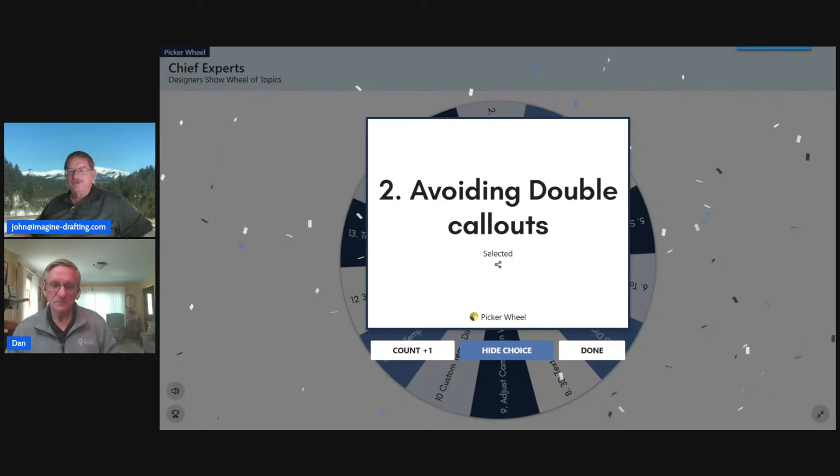While Dan's spinning that, we basically just do the spin of the wheel sometimes to come up with topics to talk about. So if anybody's got any questions or topics they want to talk about Chief today, make sure you put it in the comments. Yeah, bet. There's so many, we could go on and on forever talking about Chief, as you guys already know, and as we already do, we could pick out any.

We could talk about the project manager for hours, but we're going to talk about double callouts. Have you ever had double callouts? So when you're working on a project, let's do a door schedule quick, or a window schedule. Anytime you do a schedule, let's pop in a quick schedule here. So we got a door schedule on the first floor, and then I'm going to paste a door schedule on the second floor. And when we go look at the callouts, you'll see we get double callouts. And you go, why does that happen, John? It happens because you have two schedules. And what's the key thought for that? Two of the exact same schedules. Exactly, okay.

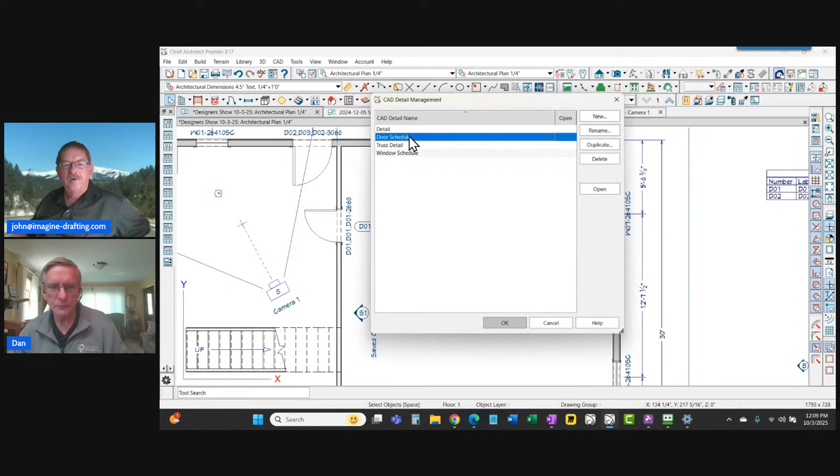I'm actually surprised I didn't get double callouts right away because I do have a door schedule in the CAD detail management. We used to get double callouts with that, so I'm surprised I didn't this time. I wonder if they did something in Chief where if you put a schedule in the CAD detail window, it just doesn't do double schedules automatically.

I don't know, but anyway, in this way where I have the schedules on the plan, why would you want two of the same schedules in your plan? Well, in this case, maybe I want a schedule for the first floor doors and windows, and a schedule for the second floor doors and windows.

So all you have to do is go into the defaults for your schedules, and under general, you'll have this thing where it says include objects from all floors. We don't want to do that. We want, on this schedule, the doors for the second floor only. There's lots of other options here.

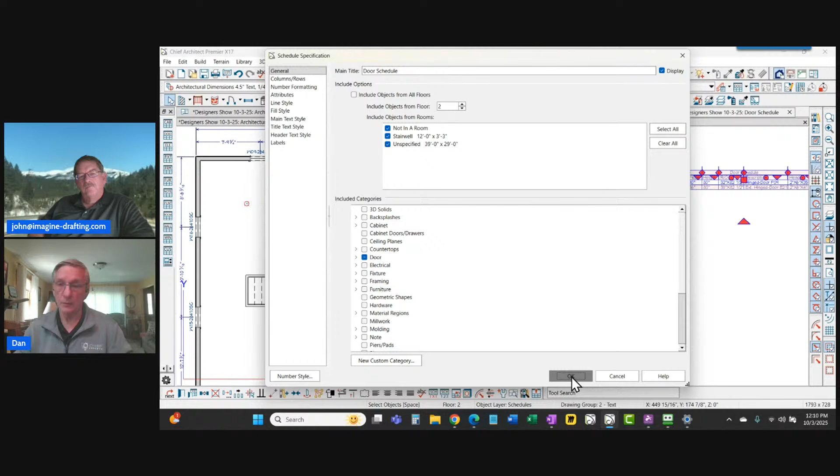Schedules in Chief are phenomenal. You can do just about anything. In fact, I don't even have any doors on this floor, so let me put a wall in and add some doors.

So there you go. Now we've got two different doors in the schedule, and we still have the double callouts. So let's go back down to this one, because it's still set to include everything from all floors. And this one, we want to include just the first floor. Okay, then click OK.

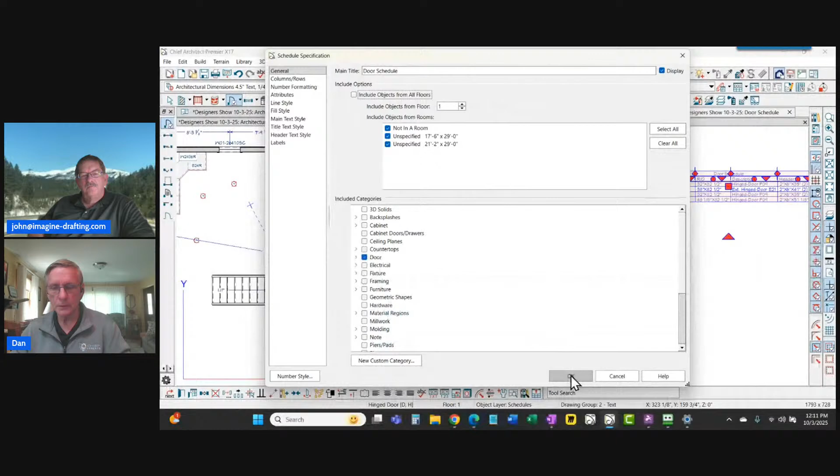And now we got rid of the double callouts. We got it here and here. Although I'm just seeing something - I am getting the double callouts in this.

So your other schedule you'd have set up to labels, not callouts. Yes, exactly, so let's go look at that. Actually, let's just delete that and see if that goes away.

Go back to our plan, and there we go, I lost the schedule, I lost the callout. I like the callout as part of the label instead of a callout like this - that's just my preference. So here's just a plain callout for the door.

So now we got a door callout for each floor. So it did pick up that schedule in the CAD detail window.

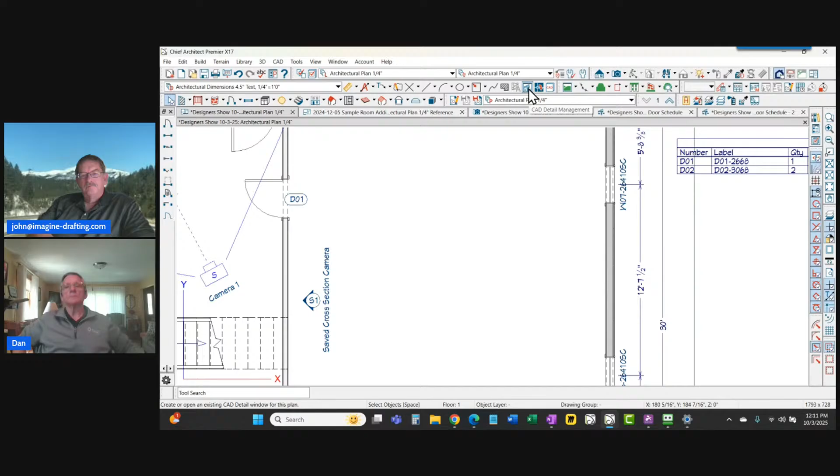So what if I want the same schedule to be on two different pages of the layout? Well, I didn't have that one on the wheel, but let's talk about that.

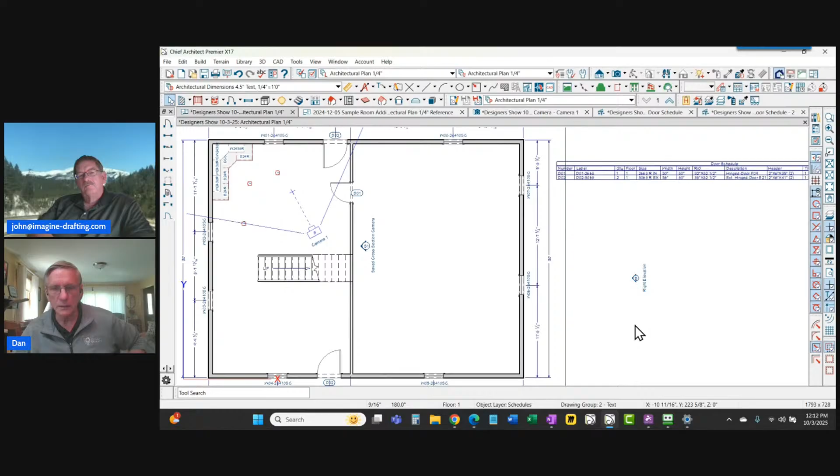So if you open the layout, let me just hit send to layout here. Chief will create a layout for this automatically, and it'll put it in the same project that I have the plan in. So now that's part of that.

So now I can. What I was hoping you would show us, Dan, is that you put the schedule in a CAD detail and send the CAD detail to the layout instead of putting the schedule on the plan. Well, that's true too, that's another option. Beauty of Chief, a lot of ways to do the same thing.

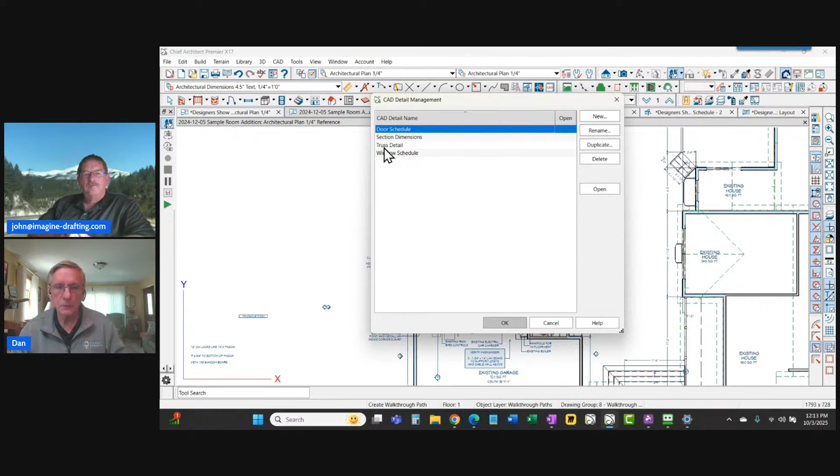So if I would have done what John said and left the schedule in the CAD detail where I would have a door schedule, I could just send that to the layout separately on any page that I want to, without having the floor plan attached to it. So good point. Yep.

All right, back to that. Any questions on that? Nope. I thought of that one because I had a client that asked about that yesterday. Yeah, and there's your answer.

You guys using schedules out there? What do you not like about them?

What's the benefit of using the CAD detail file? The benefit is that you can send it to the layout by itself and position it anywhere you want, regardless of what the plan is or where the plan's sitting.

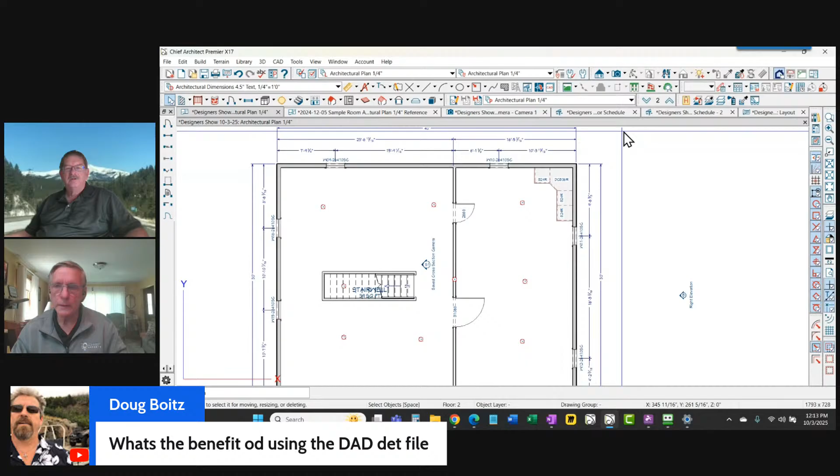Let me show that again. I've already got a floor plan on the layout, and here's the layout with a viewport on it. All I need is one viewport, nothing else. So let's make a copy of this viewport, put it here, open its dialog, and relink it to something else, a CAD detail window.

I just love what they've done with this. I'm going to do the window schedule instead of the door schedule I got rid of. So now I have a window schedule independent of any floor plans. I could copy and paste it onto any plan, any floor, any page of my layout. That works really nice.

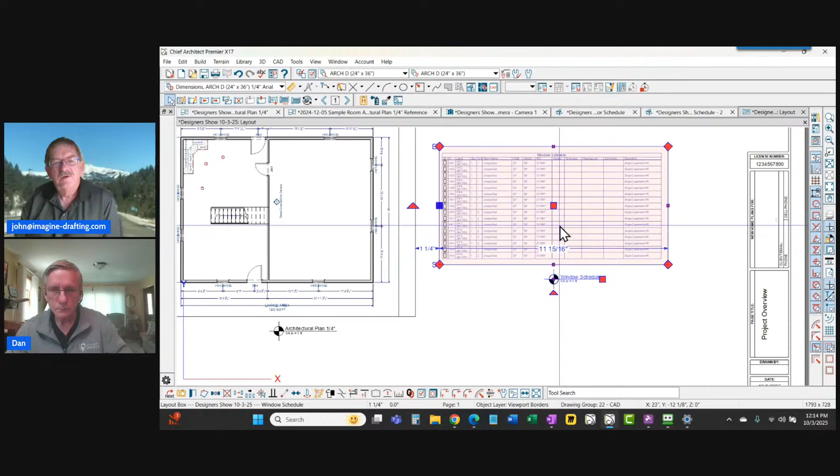So now with the new project management, when we start a new project, are those CAD details with the schedules in them staying as part of the project?

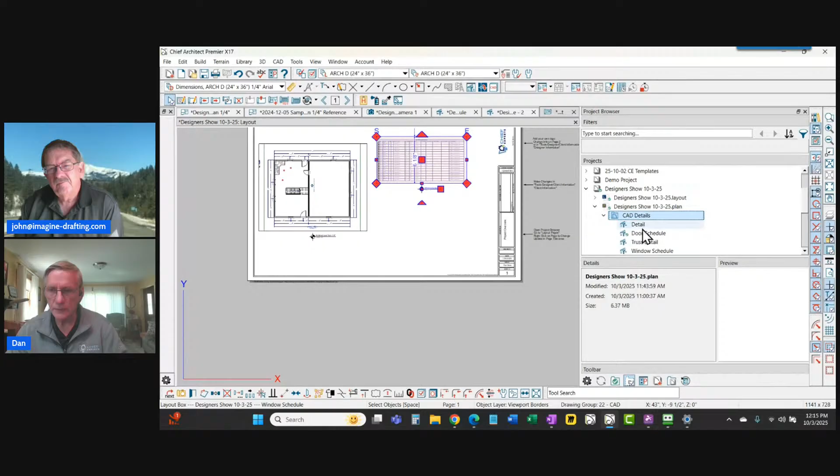Absolutely. So every plan, when it's in a project — let's go to the plan where it has all of these different things. I don't even need to send it to the layout anymore. I can just drag it here, and there's my window schedule.

I didn't even have to send it to the layout. I can just go here, and any of these things you see in the project browser for the plan, I can just drag out onto the screen and put them there.

Now there are reasons you'd want to do that and reasons you wouldn't. If you have a bunch of windows fixed in place, you don't want to be dragging things onto the screen all the time. You want to just click on a window that's fixed, open its dialog, and relink it to something in that list. That keeps the window in the same place so you don't have to move it around.

It's really cool how you have both options now in X17. So you just drag that CAD detail onto the layout? That's what I did — just grab that detail and drag it right there. And there it is, it opens this box.

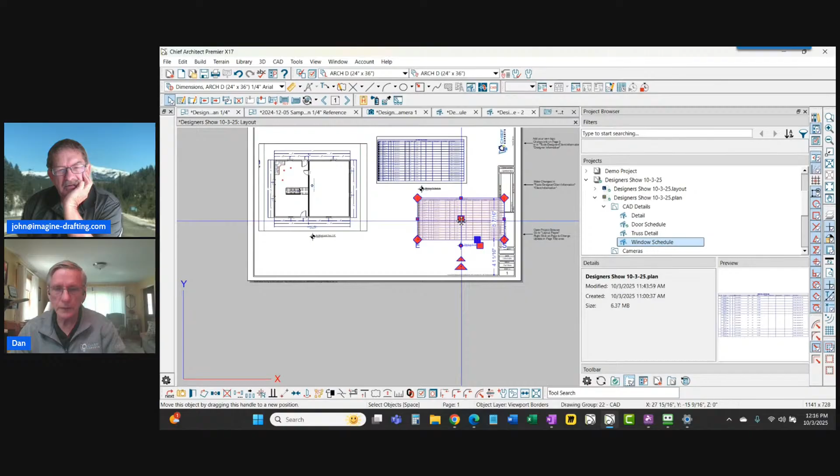What size do you want it? Done. You can do that with anything — floor plans, 3D cameras, you name it. That's pretty sweet, isn't it nice?

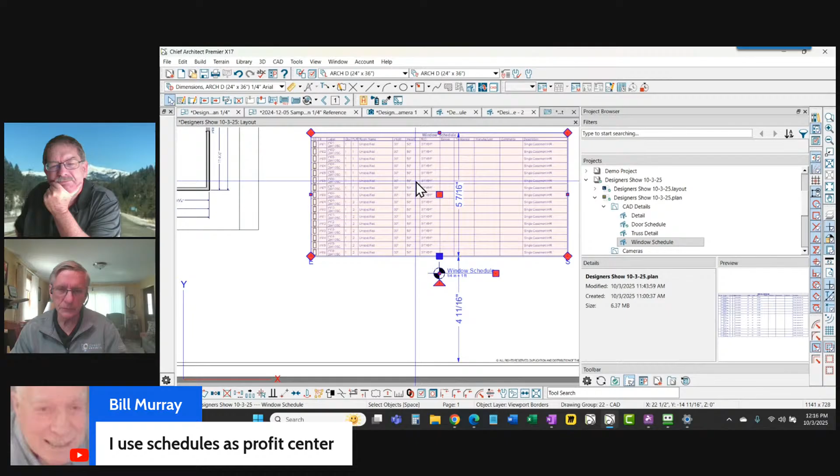One of the nice things about doing it in the CAD detail window is that this call out for that schedule could be related to it. I wouldn't necessarily need to do that on a sheet like the window schedule, but I would want to for an elevation of the house or a kitchen elevation, using a different call out there, already attached to that kind of view.

So if I went into a cross-section view and tried this real quick, dragging it on there and clicking OK — what's my label on that? There it is, yeah, so I've got the wrong kind of call out on there.

Chief's got the default setting for that, so I'd need to open this, go to the label, and switch it to use call out. Then it's going to put the number, so this would be call out number A. I'm also going to need to switch it to plot lines instead, since it was rendered.

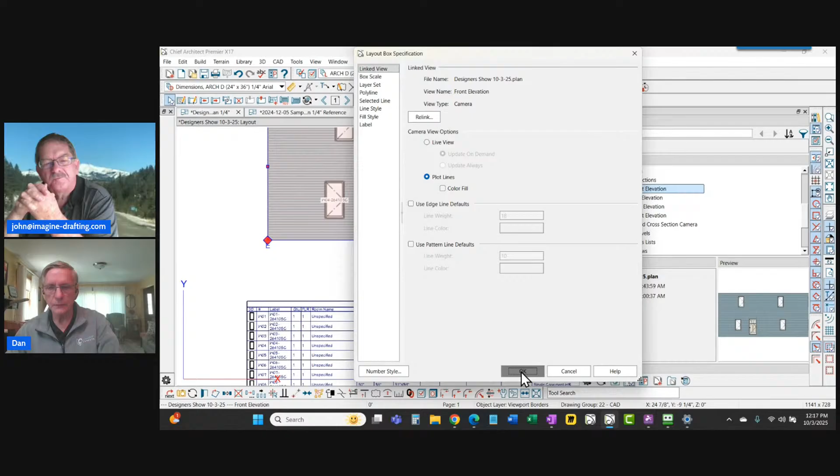Now when I go back to my floor plan and look at that label, it's going to show that view is number A on page 1. And if I move that elevation to a different page, the page number on my floor plan updates automatically. Very sweet how that works.

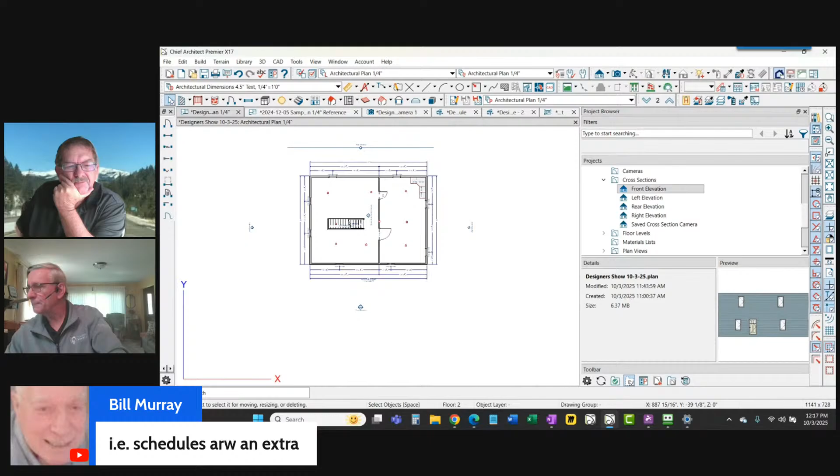Schedules are an extra — he charges for them, it's a profit center for him to make the schedules. Well, your profits just went up and your time just went down, because Chief schedules are phenomenal.

Once you get them set up, you can save them in the library now. So I could go to this CAD detail where I saved that window schedule — you could have all sorts of different kinds of schedules. Once you create one, you can click on it and save it in your library. So if you have different kinds of window schedules, you could put them in your library, and when you have the plan you need, pop it right into your plan.

You can also, in the project manager now, make a hierarchy of files too. So you could have in your CAD details, a CAD detail subfolder for window schedules, and then have all your schedules underneath that, while other details like foundation details could be in another spot. Instead of just having one big long list, you can have a hierarchy there to sort them out quicker.

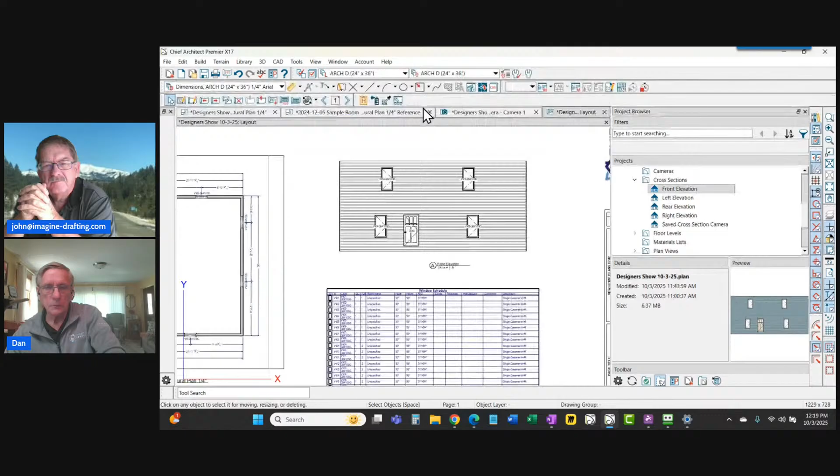Chief is doing a phenomenal job on all of their schedules. Let me close some of these windows. Let's go spin up our wheel again. That topic, which I thought would take a moment, we managed to drag out for almost 15 minutes. Way to go, John. See, we're good at that. Let's see, where'd my wheel go? Here it is, all right.

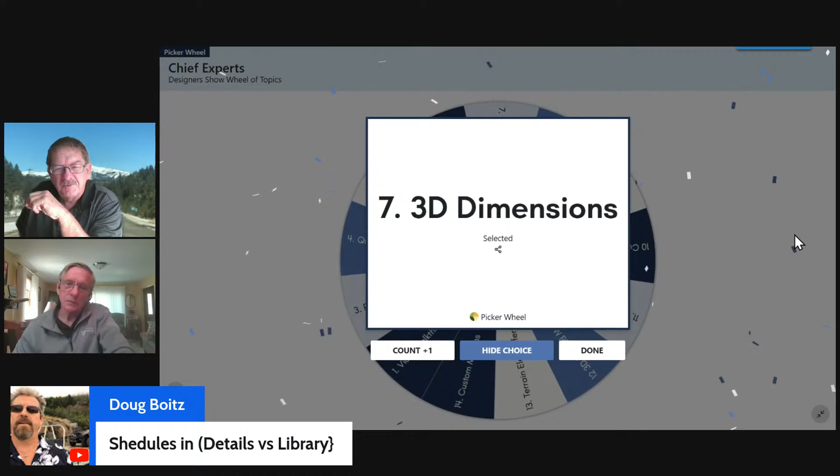So that's another question - schedules in details versus library. Can we export details now, like export them from one plan to another? Is that an option now? I thought I heard that it was, but I haven't checked it out. So go to file and export. Does it give us an opportunity to do CAD details at all? I don't think I've seen that option. Or maybe it was just saving them, and maybe they'll save in a template now when they didn't before or something. I don't remember what it was, but there was something that seemed like it was going to make it easier.

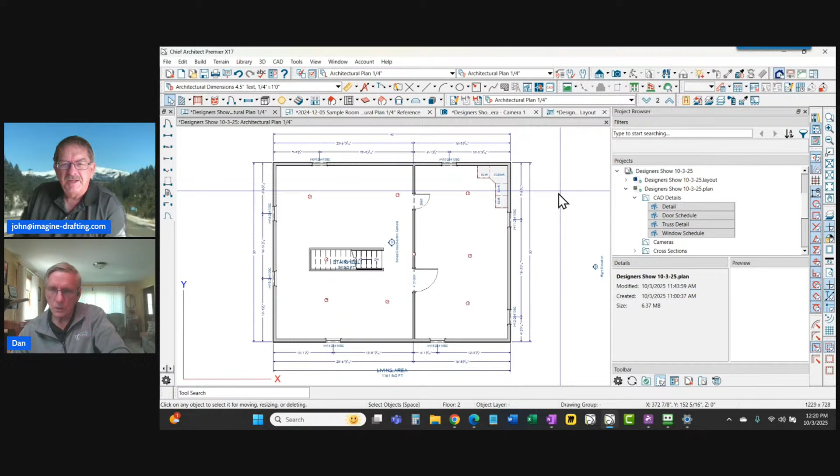So like a schedule - instead of sending it to the library to save it and use it again, you could just save it in a CAD detail and it would be there to be used. You should be able to just click on that, hit Control C, and go to your other plan and paste it in there, and it'll pick up all of the stuff for the new plan. So if I go here and paste, now I'm picking up the windows for this plan for this floor.

You can also - one of the things I've learned about Chief - is you can have a thing called common documents, and you might be able to put a schedule there that you could use to populate different plans. But keep in mind, if you use a common document in more than one plan and you change it, it's going to change it in all the plans you put it in - at least that's what I've read. I think it'd be safer to store it in a library and then use it from the library, or copy and paste it from one plan to another.

I guess the thing to find out would be if when you make a template now, all these CAD details would stay. Yeah, absolutely - your templates are going to include anything that you put in the CAD detail window. Because when they first made it so that you could save schedules in the library, it was kind of a pain - you still had to go make the CAD detail or put them in the plan or whatever. But now, if you don't have to do that, that saves another ton of time.

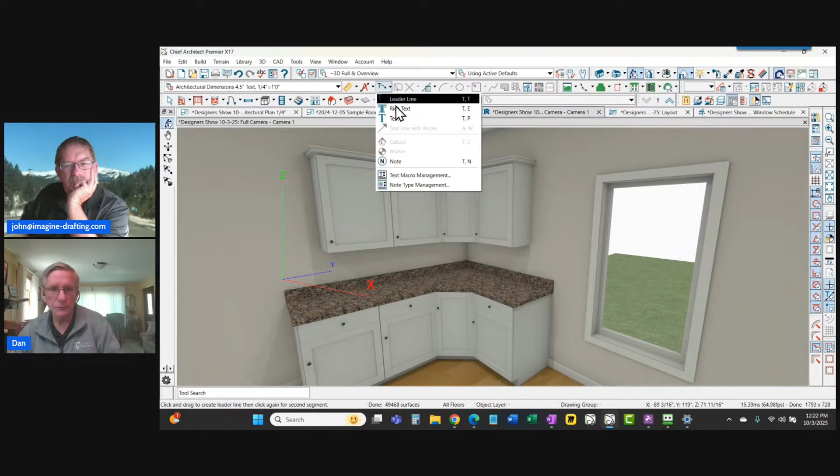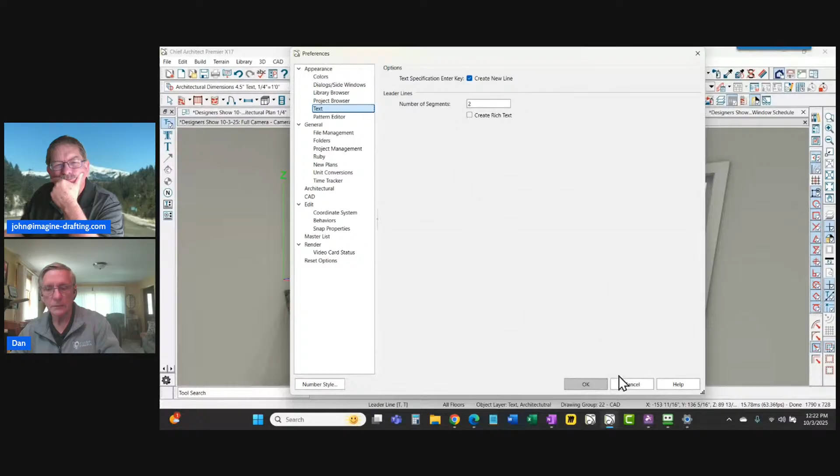3D text - are you using 3D text at all? I've looked at it a little bit, haven't done much with it. Okay, 3D text is a little confusing because if you go into 3D text and you want to put some in your plan, let's click on the one with the leader line. I've got mine set up to use plain text with the leader line, and that's a preference setting - in preferences under text, I've turned off create rich text when I'm using leader lines, so it just uses plain text. The reason I do that is if I change the scale of my drawing from an eighth to a quarter, or a quarter to half, the text size changes automatically. If I use rich text, the text does not change automatically - there's some pluses and minuses for that, I'll show you one of the minuses. So when you're adding 3D text, you'll see how that little circle kind of goes on these different surfaces.

So if I want to add text for one of those cabinets, say I'm going to click on the front of the cabinet. Before you draw the arrow, you have to click on the surface that you want the text to be attached to. So if I click here on the front of the cabinet, see how that plane comes up even with the front of the cabinet? Now I'm going to draw my text following that plane.

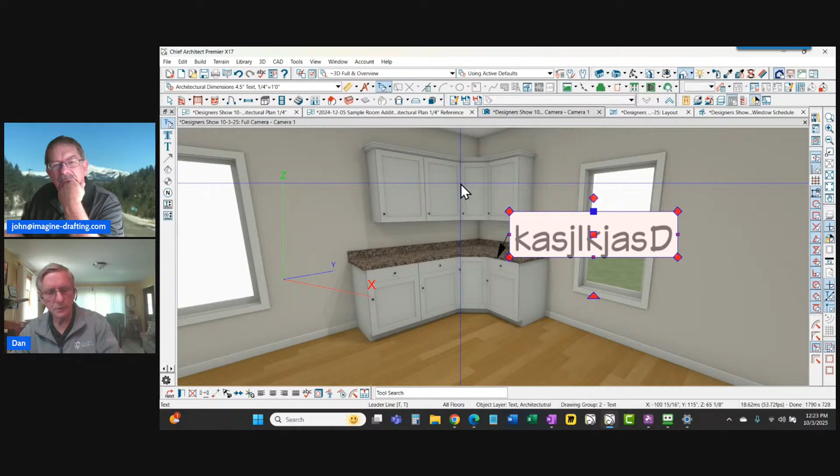Do I have that set up wrong? Let me just put some text in here. Yeah, I've got the wrong text scale going there. Why is that? That's too big. What did I get for text size? Oh, it's 4.5. Why does it seem so big? It says it's 4.5-inch text. Huh, I don't know, when it's not attached to the cabinet.

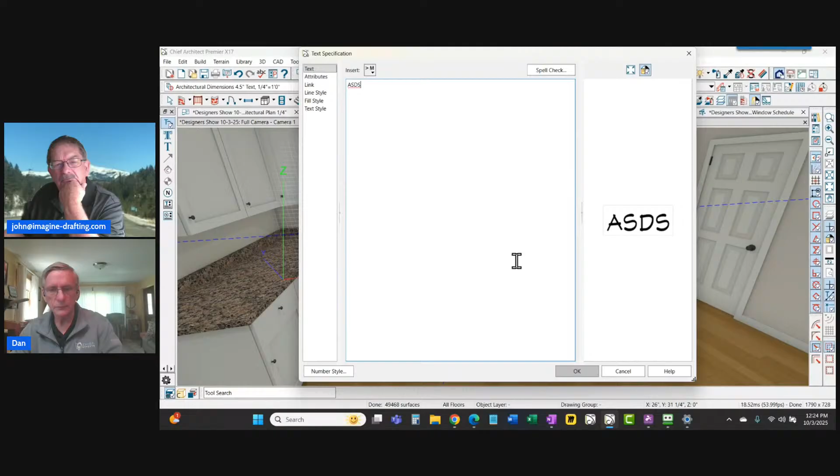Why didn't it attach to the cabinet? Let's try that again. So, rich plain text, draw my arrow, 1, 2, type some text, click OK. And still not attached to the front of the cabinet. Well, what am I doing wrong, John? I have no idea.

Text. Anybody on the call know what I'm doing wrong? Because I don't. This has always worked for me before.

Do you have to select the cabinet first? No, you can't. When you click the text icon, you can't select the cabinet. I saw you select that cabinet at one point, but you might have unselected it. Yeah, I did, but I can use the surface. Is there an offset or something you have set? I don't think so.

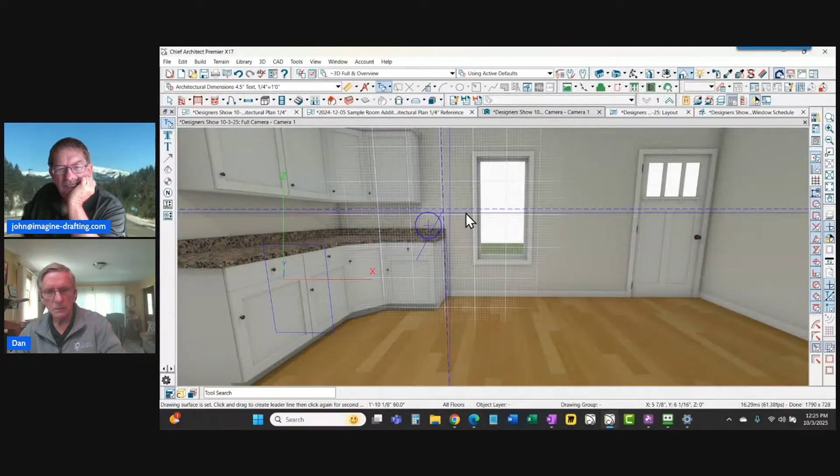It's just not working. Okay, well, try putting it on the wall once. I'll have to look into that. I did this before and it worked fine. I saw you do it the other day, and it seemed like it worked. Well, there we go, we've got utter failure happening today. Anybody got an idea? What am I doing wrong? I just did this yesterday and it worked great.

Let's try the side of the cabinet. Let me go there. Okay, text, click, bring it up, over. And I thought I adjusted my text yesterday.

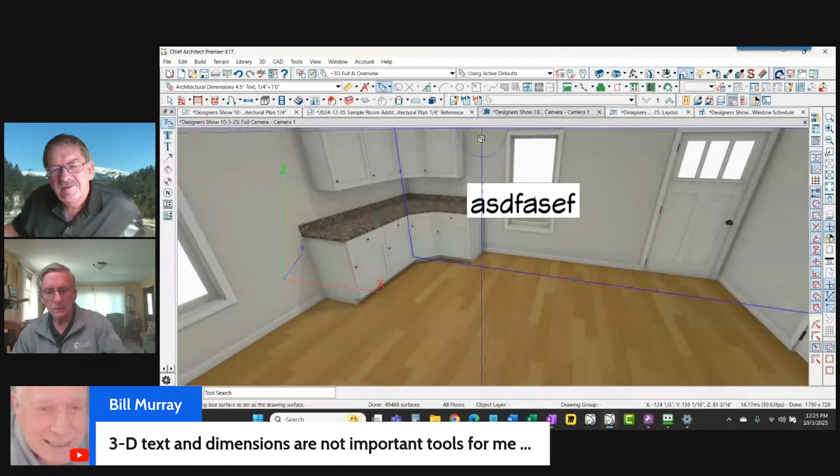No, okay, well I shouldn't have put that one on the wheel today. Spin the wheel, that's it. I was just saying I shouldn't have put that one on the wheel today. All right, we'll spin the wheel. If anybody has any idea why that's going on wrong, let me know, I will dig into it.

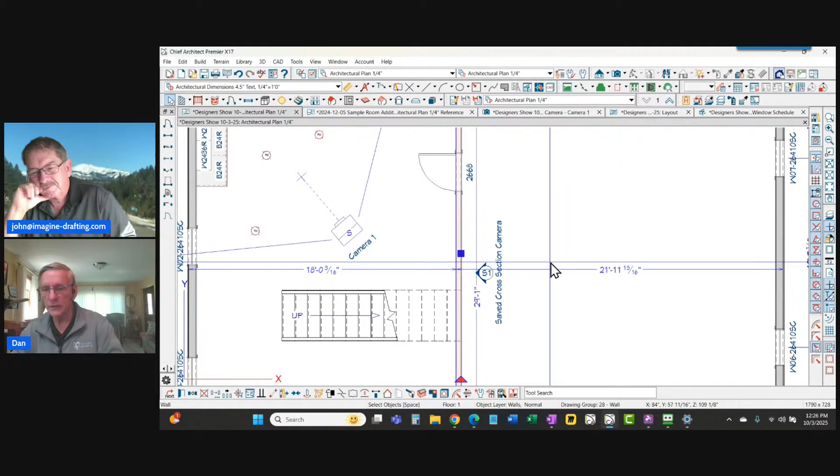Custom temporary dimensions, this I like a lot. Let's see, I want to hide that choice. So custom temporary dimensions means that no matter what view you're in—it used to be that when you'd click on something, you would get these temporary dimensions in all previous versions before X17. They didn't have this in 16, I don't think. No, you would only have one available setting for these temporary dimensions, either surface, framing, interior, number size, or arrow size. Now all of these different temporary dimensions are part of the dimension type that you're setting up for your different kinds of views. So here's your setup temporary dimension option now for that view.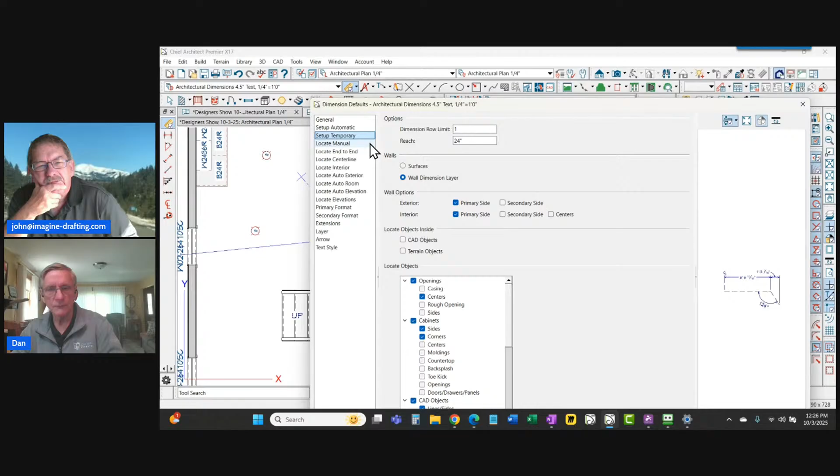So I could set this up to have different kinds of things dimension temporarily. So for example, if I double click on locate interior, right now it's going to locate the main layer inside and it's not going to pick up anything else when I do my temporary dimensions using that tool. See how it's going to the wrong side of the wall there though. But it's not going to pick up any windows or doors or anything like that.

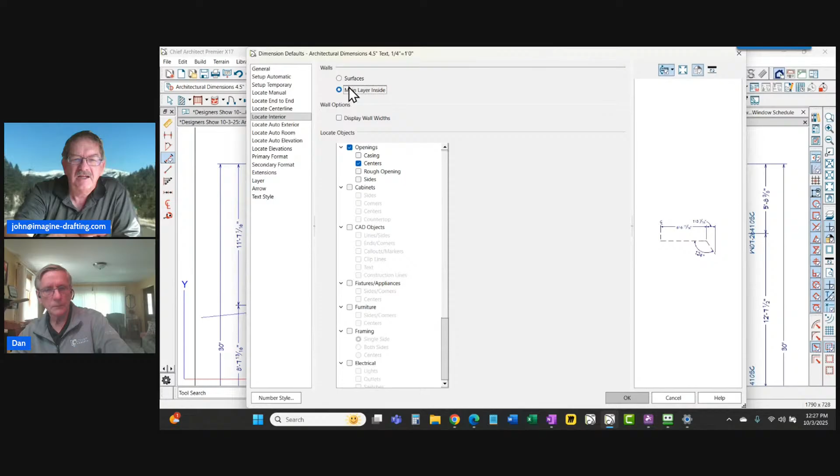Yeah, it should be on the inside of that wall, shouldn't it? So what happens if you do select a door in that? Does it give you, what's it do for the temporary dimension then? Let's go turn it on and see. So let's go here and let's go to our temporary dimensions for interior and let's go to our openings and turn the centers on. No, that's not what I meant. Leave it set the way it is. But instead of selecting a wall, select a door and see where the temporary dimension goes to.

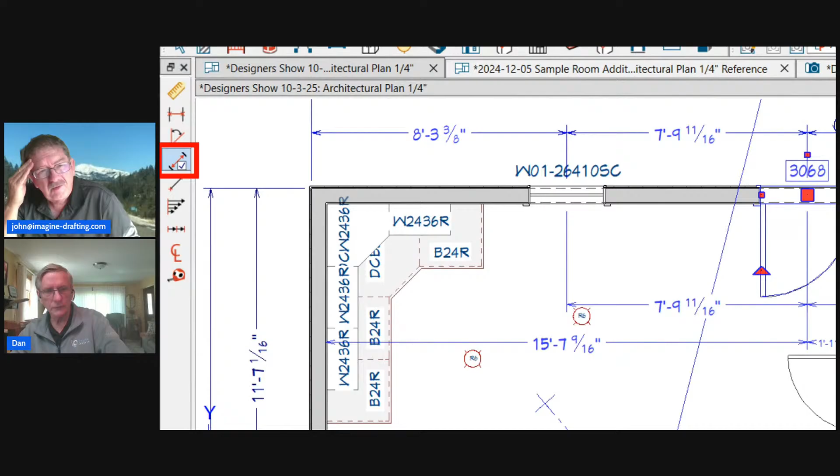Oh, select here. Yeah, so there it's going to the center window. So that's not going to pick up because—all right, it's selecting those things and it's not the walls because, okay, that's not going to select doors because we don't have doors turned on for that. So it's not going to be able to do what I want to do.

I know the dimension won't pick up the door, but what happens with the temporary dimension if you select the door instead of the wall? It goes from door to window, and here it's picking openings and switching it up.

Personally, I don't use temporary dimensions. I'm always drawing my dimensions in. So if I'm drawing an interior dimension, I use my hotkey DI and draw a dimension over the walls. I have my hotkey set up for dimension interior, and I use DE a lot for dimension end to end. Then I just pop my dimensions onto the different things I want. I like dimensioning that way, and that works for me.

All right, let's move on. Anybody come up with that 3D text thing?

So basically what the new temporary dimensions do, it's something we couldn't do in previous versions, is you can set it up to measure the surfaces in one saved plan view and the main layer in another saved plan view. So if I go to my as-built measuring plan and turn it on... can I group select these? Nope, I can only do one. So what I'd end up doing is set my temporary dimensions to surface, which is what I should do anyway - which reminds me I need to do that.

Yes, Dan, we want this template to be perfect for this class. Get it?

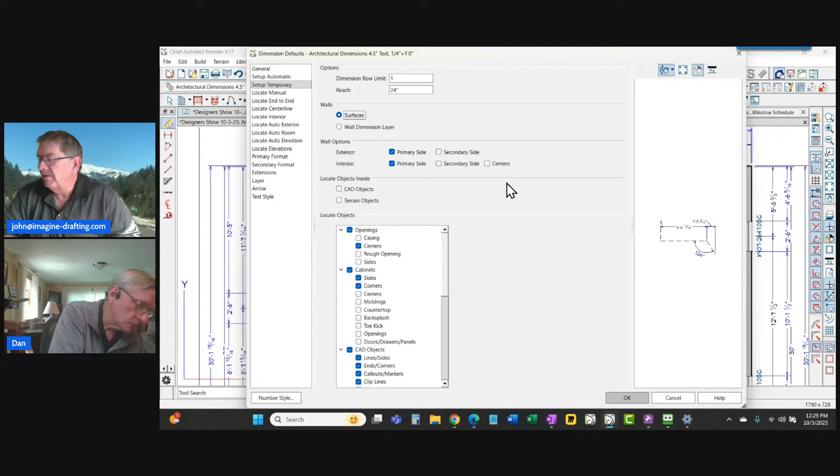All right, so now when I click on my walls, I'm going to set it to surface instead of framing with my temporary dimensions. And speaking of that, I'm going to go to my template and open that template right now. Let's go into that template.

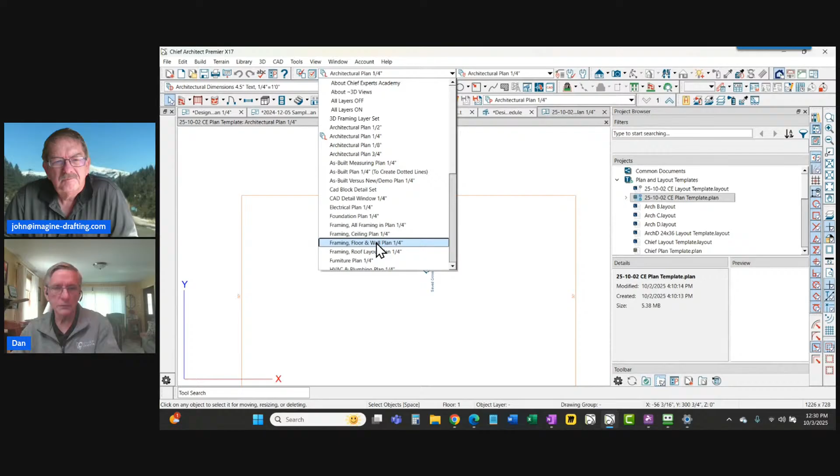There's two settings I want to make, so I'm going to go into that. This is how, if you're working on something and want to change your template real quick, and you have the project management turned on, it's right there ready for you. So I'm going into my as-built measuring, clicking here and double-clicking on the ruler, going to set up temporary and setting that to surface right now, and I'm done. I just updated my template.

The other thing I wanted to do was set up my quarter inch - I had turned off my setup automatic. I turned off my auto refresh in my template, so I need to turn that back on. Done, I'll hit save and close my template. Now my template's up to date, so the next time I create a new plan, those changes will be there.

So that's a really nice thing about having the templates right here in your project browser. All right, let's go spin up the wheel again.

And you didn't even open that template - you just did it right from the project. Yeah, I went straight in, I didn't have to go find a plan on my hard drive to open it. I just opened the template from the project browser because that's where it's stored.

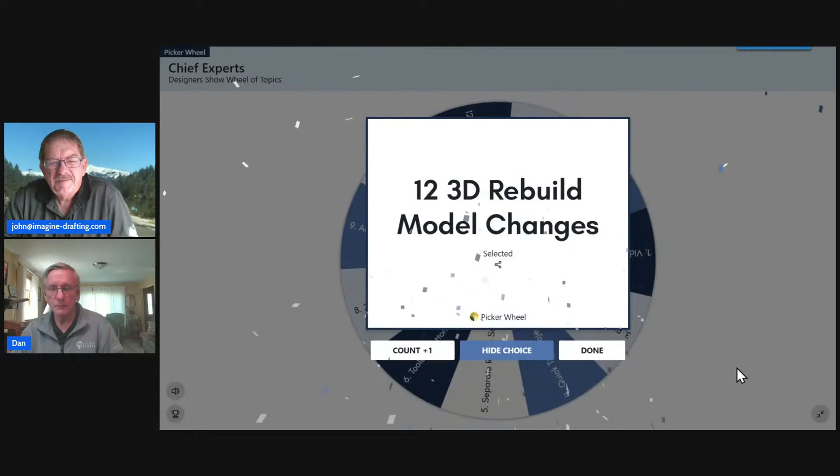Okay, so let me spin that up. What do I got here? 3D rebuild model changes. All right, I threw this on there because I'm mad about this.

We were talking about this the other day - you know how when you have a larger plan and you start getting a ton of surfaces in it? Like this plan here, I've got a lot going on, and every time I want to do something, it's going to rebuild the 3D model every time.

All right, so back in X16, let me open that real quick and show you guys. As I thought about this, I believe we did talk about this in Coeur d'Alene back in August. Yeah, I think we did too - I kind of forgot about that.

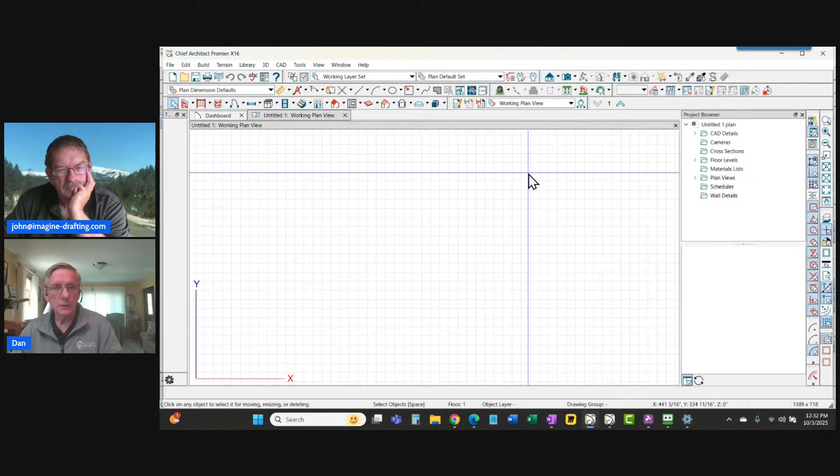Let's just go open a new plan here in X16. In X16, when you clicked on the 3D menu and hit 3D view defaults, you had an option to turn off the auto build of walls, floors, and ceilings. Because every time you do something to your model - open a wall, close this dialog - Chief's going to regenerate the 3D automatically for everything in that entire model.

Well, when you go to X17 now, and you go look at that same menu... view default, it's gone.

I went, no, because I use that a lot. I'll turn off the auto rebuild, then I'll work on my plan, and then I'll hit F12 to regenerate everything. And I was wondering, well, why did you turn that off? I don't remember what he told us.

Well, what I found when I Googled it the other day was that you have to do it per object class, like the walls. You can turn off the auto rebuild there. You can turn off the auto rebuild for roofs. You can turn it off individually.

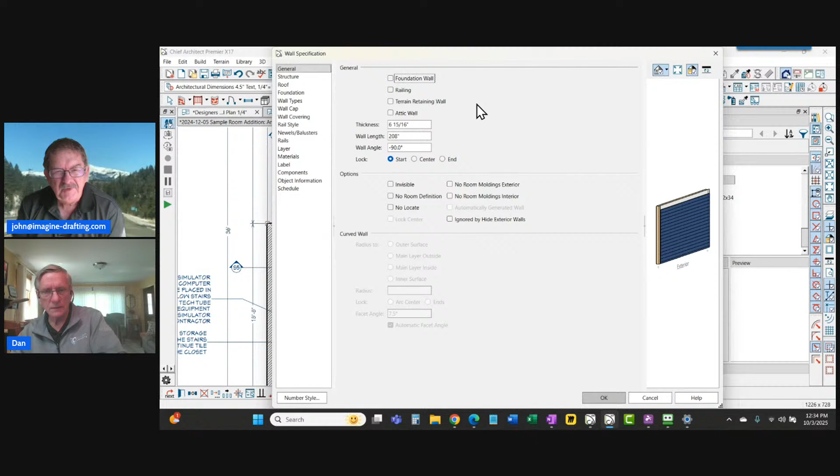So if that's the case, which I haven't had a chance to check out yet, it's actually a good thing, because then I can build on my roofs and turn that off so they don't rebuild when I'm not working on them. But I can leave the walls turned on to rebuild automatically.

That's different though. Walls don't have any automatic rebuild of walls. Maybe it wasn't. There was something. I don't remember all the details.

But what you might be talking about was, so if I go into the roof defaults, you could turn on auto rebuild roofs, right? And we use that for a while to get our roofs started, and then we turn it off. But that doesn't have anything to do with regenerating the 3D model.

Well, I mean, yeah, it's going to add new roofs, but the 3D model is going to keep regenerating no matter what. So anyway, right.

So you guys, if you're using that, turning the 3D model rebuild off, and now you're wondering why it doesn't work in X17, it's not there anymore. And I don't know why. We still have the button, the tool to rebuild 3D.

I know, why? So I'm hoping somewhere they made it so that you can make it so it doesn't do it automatically. We've got this right here.

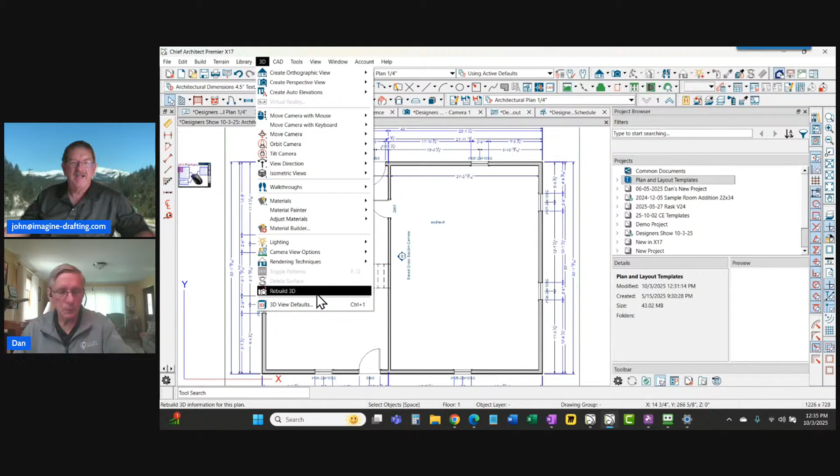Well, we'll have to dig into that. If anybody knows, terrain has a rebuild thing that you can turn on and off, so we could just hopefully hit that button and it would rebuild the terrain. True, terrain's got that. So you could auto rebuild terrain on and off.

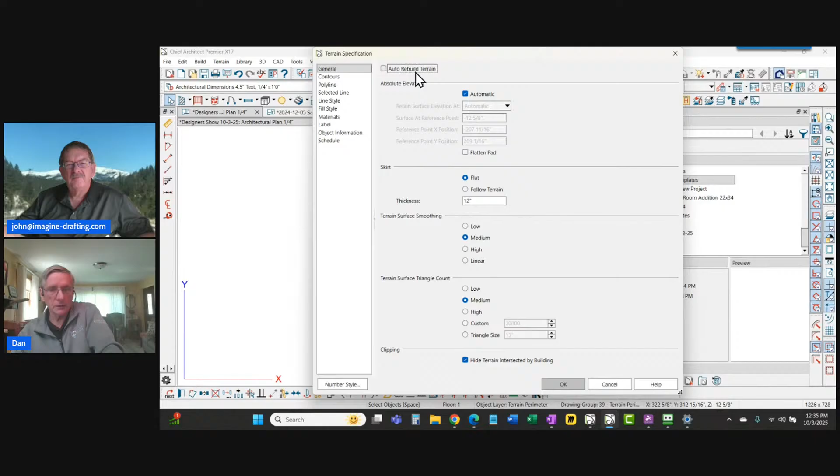That one works great. Yep, use that all the time. But I don't know any other way to turn the 3D model off. We'll have to do some more research into that. Anyway, if we find something out, we'll tell you about it next time.

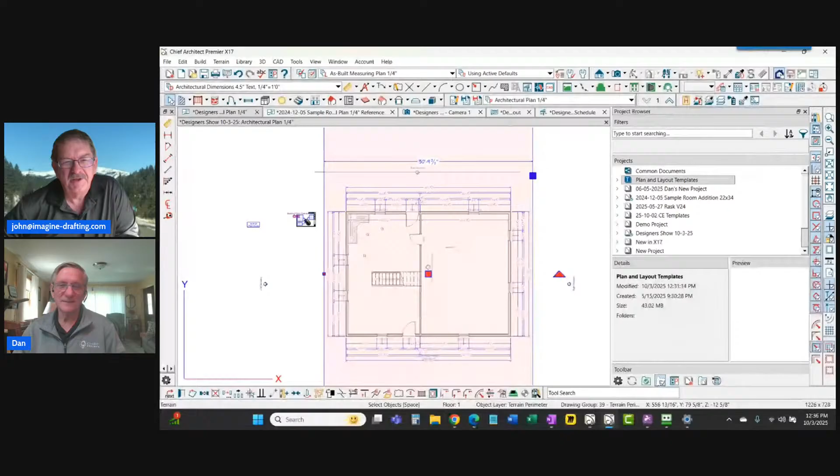I got a little terrain perimeter around it. And if I bring up a 3D view, we're going to see that terrain perimeter. And so when we open the dialog for the terrain in X17, we used to have this here where we would set the reference from the surface of the top of the floor plywood to where the terrain is. And right now it's 12 and 5/8 apart.

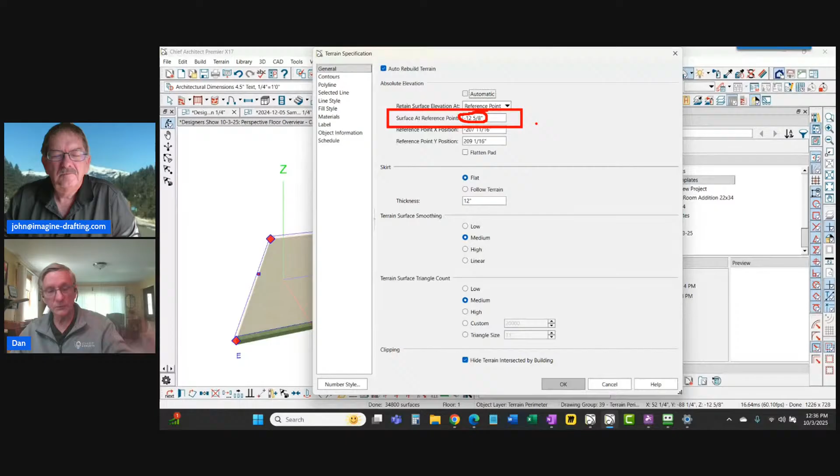And we could still do that. That'd be fine. And we could do that from a reference point. Again, this is still, we were just talking about this Wednesday and trying to figure out what all this does. So when we click on, so go ahead.

So go back to that panel. Okay, so you can still do it kind of the same way instead of from a reference point. If you just hit the down arrow there and go to contour 0, elevation 0. Now instead of telling you the difference between the two, it's telling you the relationship of the two.

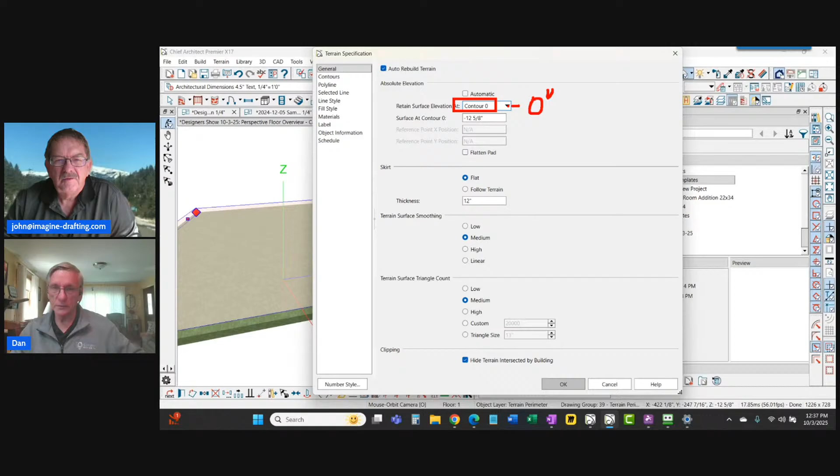So the terrain in that one is negative 12 inches or whatever it is below 0. Before you would put a positive number in there to make the terrain go down. So now they're actually taking, so it's just like contour 0 means the 0-inch floor height of the model. Because everything is measured from the 0-inch floor height on floor 1.

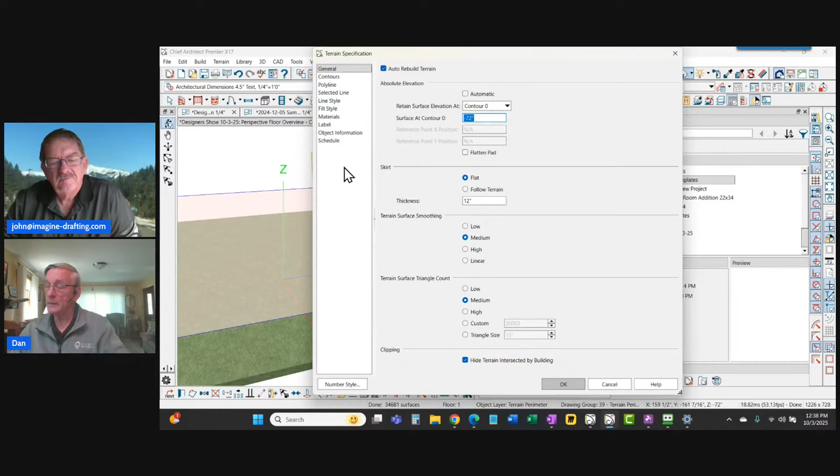So the terrain is 12 and 5/8 inches lower than that. If I make this minus 6 feet, it's going to lower the terrain 6 feet lower than the top of the plywood. That's kind of the way it always used to be, except now you type a negative number. I always told people, don't use minus here, just put in the separation amount.

Now they're actually going from 0. But if we use a reference point, let's go ahead and create that walkout again real quick. Let me tile my display here, turn this off, and go back to the floor plan and drop in a couple of elements.

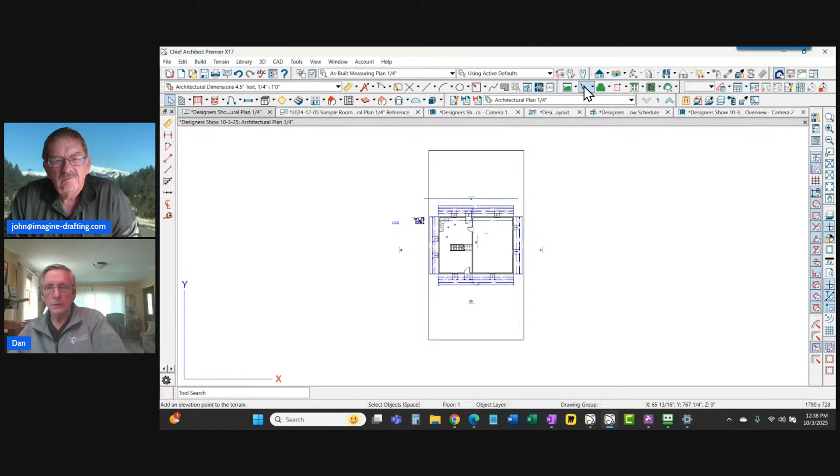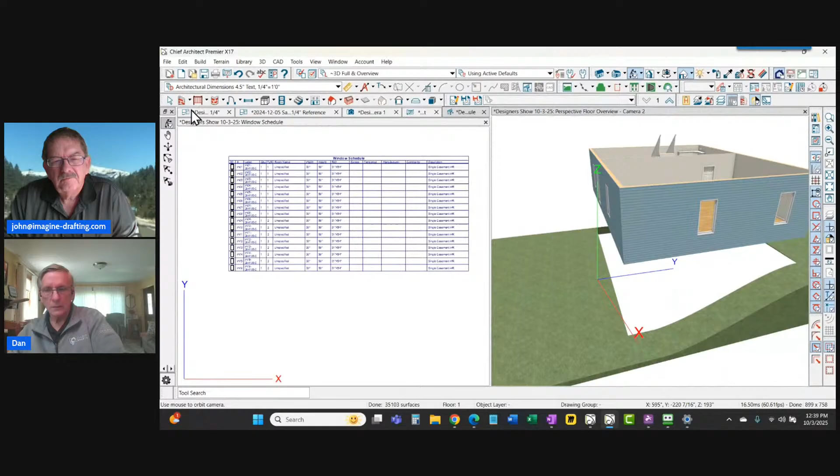We're going to put in a region, an elevation region. We'll put one here and one back here, and open the dialog for this one and make it minus 8 feet. That'll make a hill going down from the front to the back, 8 feet, right? Just like that. So now if we put that reference point in, we have a little new icon down here.

Well, here it says delete reference. No, that's what will come up after we put it in. Where'd it go? Did you have to do that from the... No, we did it from the 3D yesterday or the other day. Let's try it again here. Oh, there it is. I thought we could do it from here.

Oh yeah, see, there it is. So you see how it moves on top of the terrain there. So if I want my reference here to be that number that I put in, if I open the dialog for the terrain, there's that first point that I put in there.

And then I suppose I could adjust these two. I'm still trying to figure out why I need that. So let's redo your terrain, Dan. I think I might have a way to show this better.

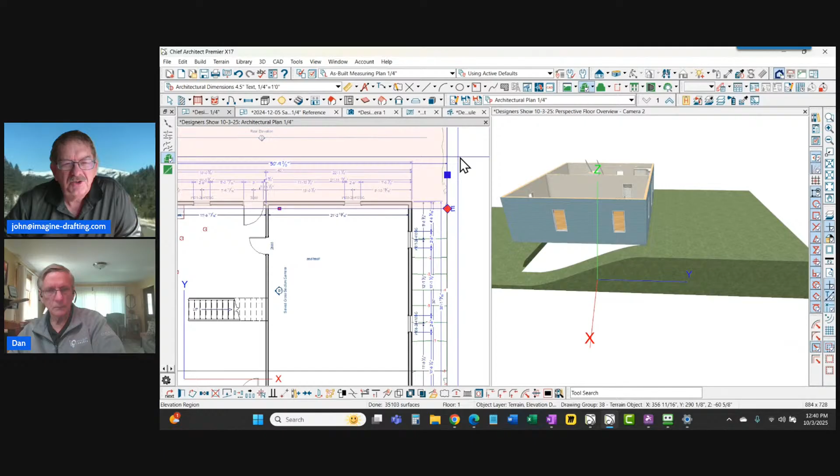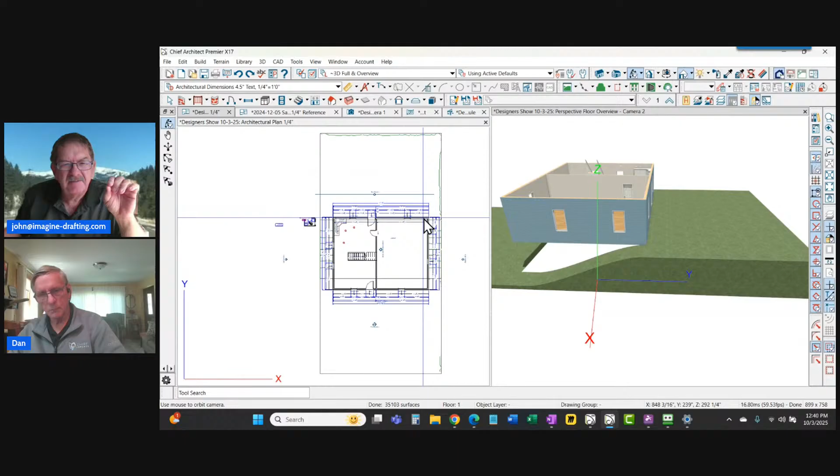Make your terrain in the front, pull it, just make it a couple feet wide up at the front of the lot, up at the top. Up here? Yeah. Make the terrain perimeter the size that it was. And instead of drawing the front yard or the backyard, so that it's the whole backyard up to the house, just make it up.

Select your terrain elevation data. Doesn't a lot of this have to do with if you have sea level numbers? Yes, if you want to survey to show what that point is doing. What we need is the elevation to be higher in the front of the house or the back of the house than the floor height.

Oh, okay. So let's just make this contour here. Instead of making it 0, let's make it 24 inches up. And then pull it away from the house. Oh yeah, pull the bottom edge away from the house. Hang on, there we go. So that's 24 inches higher than the floor, which is 0 now.

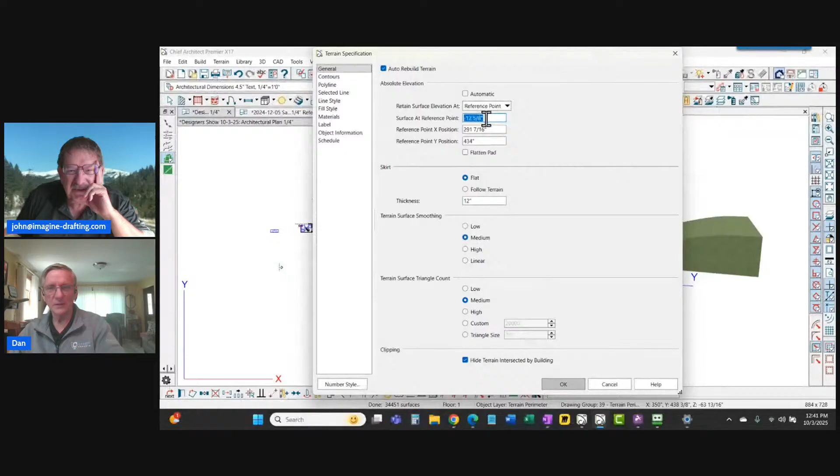All right, so now it's 24 inches higher. It's 24 inches higher than minus 12 and 5/8. Yeah. So now put that at 0. If we put that at 0, okay, and say okay.

Now let's say you want your sea level height to be your second contour line down from the top. Put it right on that line. Right there. Now your floor height is the same elevation as that contour line right there, because we set that difference at 0.

Well, right, here it says 0 right there. So at that point, that reference point and the subfloor of the house on the first floor are at the same elevation. Okay.

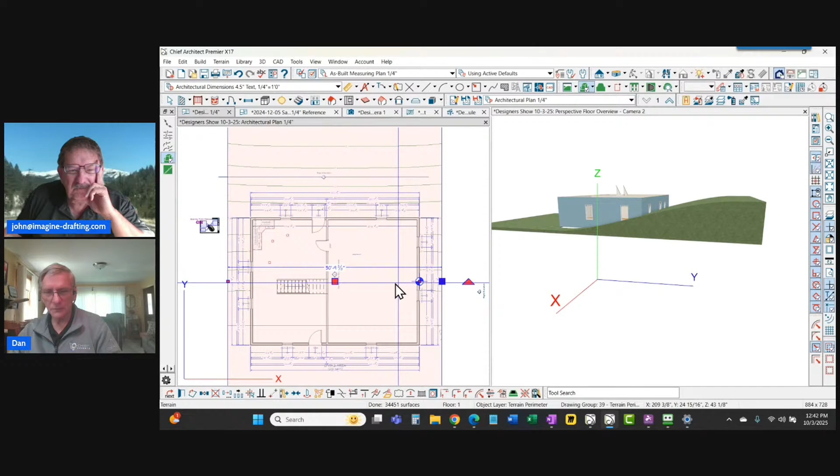Now if I slide that down here, see, it's going to move the terrain. Yep, so that'd be the 0 — whatever elevation that is. It's the same elevation as the house floor, above sea level. Right, right. So then I could adjust my contours from that. I'm still trying to understand that.

We'll learn more about that as we go. So what'll happen is if they give us a macro that is associated with the terrain, you can click on a floor that's using that terrain point, that elevation point, and the house and all that kind of stuff. If there's a macro you could click on, then you could put a label on the subfloor, on the main floor, that says this is this high above sea level, finished floor above sea level.

I'll bet you Rene has one of those, which a lot of municipalities require. Got it. Okay, let's get a little technical on that stuff now.

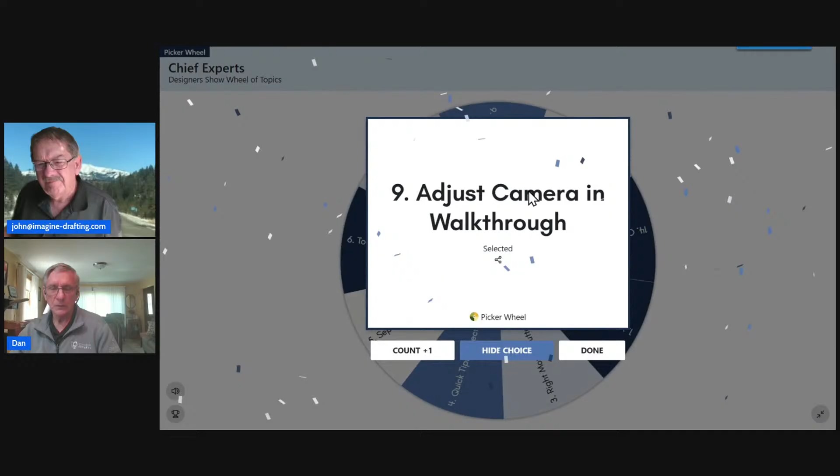So adjust camera in walkthrough. So you guys using walkthroughs at all? The video walkthroughs? I guess I'm going to show two things at once. I have another thing on the wheel, so I'm going to show them at the same time.

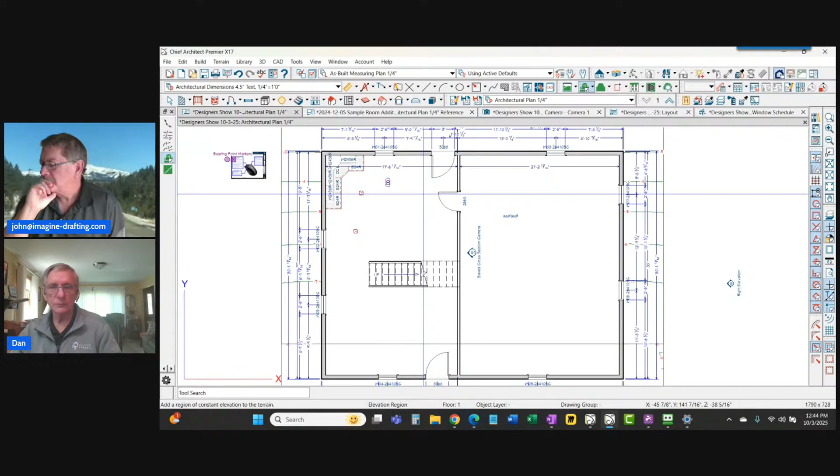Chief now allows us to create video walkthroughs really easily and fast. They're just a tad different in Windows versus Mac, not much, but we'll start by creating a walkthrough path. That's this icon right here.

So it's basically you're going to be drawing some CAD lines. I'm going to click on that, and I'm going to start up by going here, and then I'm just going to continue drawing this through. And then, you know what, I'm going to go up to the second floor.

So when I go up to the second floor now, there's that camera, and I can continue taking that walkthrough through the second floor. So it knew you went to the second floor just because you went over the stairs? Yep. Isn't that cool? Wow. Yeah, I like that. All right.

Yeah, now I want to set some camera. Right now I've only got one view. But let's go to view, let's go turn on our walkthrough preview. And I believe we can turn that on with that icon as well, right there. So yeah, because it's the same icon.

Okay, so view walkthrough preview, and that'll open up a side window here. And then you've got a little gear icon down here to be aware of, because you can turn off—if you don't have your keyframe settings, you need those on. And if you want to use less space, go to a horizontal setting, and it'll put some information over here as well. Okay, so you can see a bunch more stuff.

I imagine I could pull this off onto another screen and work with it over there. Let's just turn that back, let's leave it like this for now. All right, so there we go. We've got one keyframe in there, and that's the one going up the steps.

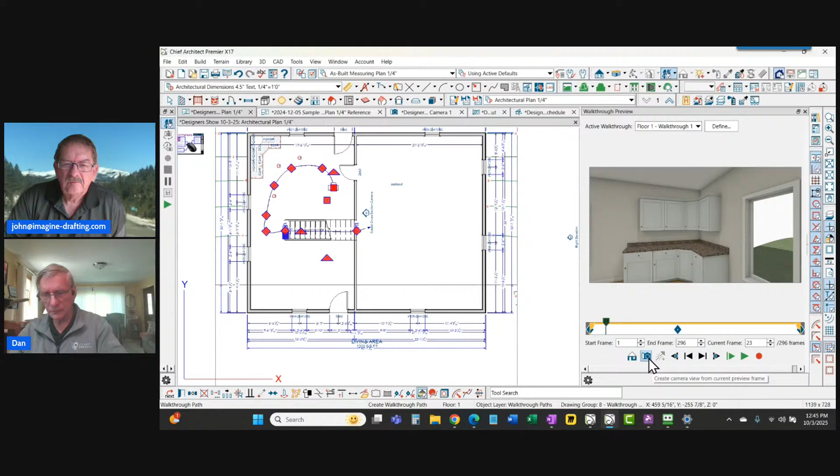I need to add some more keyframes. So I could probably do it—I've never tried it from here. Create camera view from that spot. Oh, okay, what that did is it created a picture of that view. I don't want that, let's just go back to our floor plan. And I'm going to add some—yeah, it created a camera view, not a keyframe.

I'm just going to delete that camera view. I'm going to click on the line here, and I'm going to click on this icon right down here to add some more cameras. I'm going to click on that, click on the push pin to lock that, and I'm just going to drop a bunch of cameras along the line here. Oh, didn't do it. Come on, push pin, do your job. Click, click, click.

Now I could take these cameras and rotate them. So I get out of that mode, and I could say, oh, I'm going to look at that one here, and I'm going to go here and look more at that, and go here and look more at the stairs. And on this camera, I want to kind of pan down on the cabinets.

So I'm going to open its dialog, and I'm going to change the angle of that to go not here. Where was that again? Where was that?

General right here, tilt angle. So let's go minus 45 degrees. We'll kind of do a bunch. And the other thing I'm going to do with my camera is make it physically based. I'm going to go define that, and turn on DLSS.

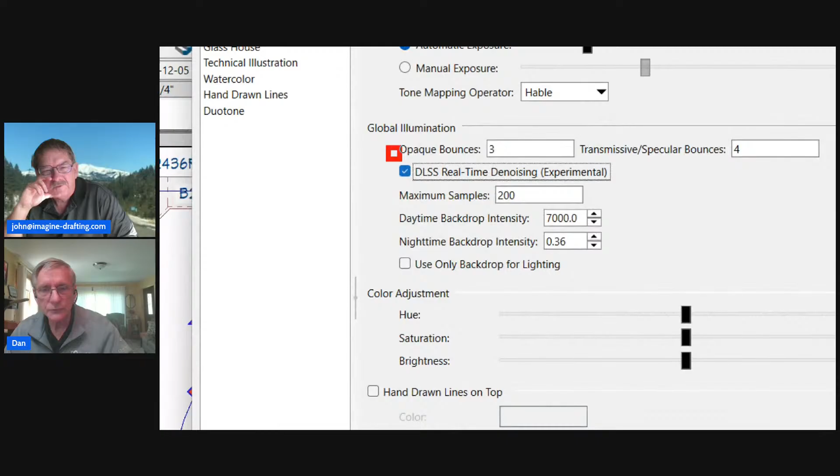Real-time denoising. This is Windows only, not Mac. Mac won't have that setting available, unfortunately. That's an NVIDIA type function that they've added in Chief Architect, so you have to have an NVIDIA RTX card, I believe, in your computer for that to work.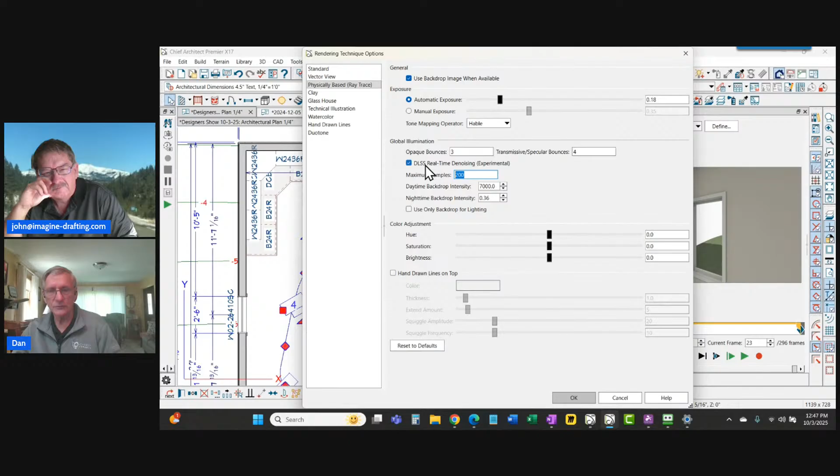And then you could set your samples a little higher or lower. With the DLSS, it makes it go really fast. You'll see what I mean here in just a little bit. So any of these settings on the screen, I can adjust for that camera or the whole string.

Now I could go back upstairs. Let's see, can I add a keyframe along the stairway here? I can. So let's say I want to look over here while I'm going up the stairs. Now let's go up to the second floor, and I could continue adding some cameras in there, just hit that icon, hit the icon, hit the push pin, and add those cameras along.

I'm not going to do a bunch more, just going to get this started. So now I could go down here and see where I'm headed with my cameras by just doing the scroll bar down here. I think that's really cool, it makes it really easy to set this up and see what you're looking at.

All right, I've got it where I want it. Now I'm ready to record this. I'm going to click that little green button here. No, sorry, the green button is to play. The red button is to record the walkthrough. See how it says record walkthrough down here? So I'm going to go ahead and record the walkthrough.

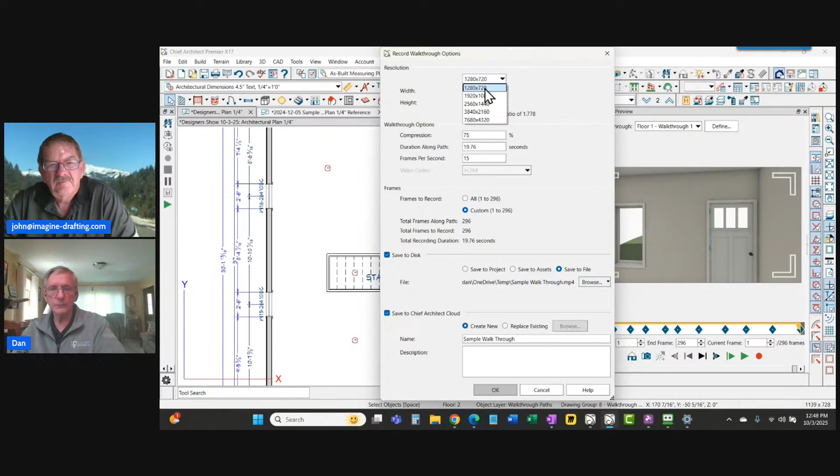I could set the resolution. If I'm just going to do low res, set it there. If you want to do higher, keep in mind the higher the resolution, the bigger your file size is going to be. I'm just going to keep it at the lowest. You can set your compression. The number of frames is 15 per second, movies are 30 per second. We probably don't need 30 per second in this.

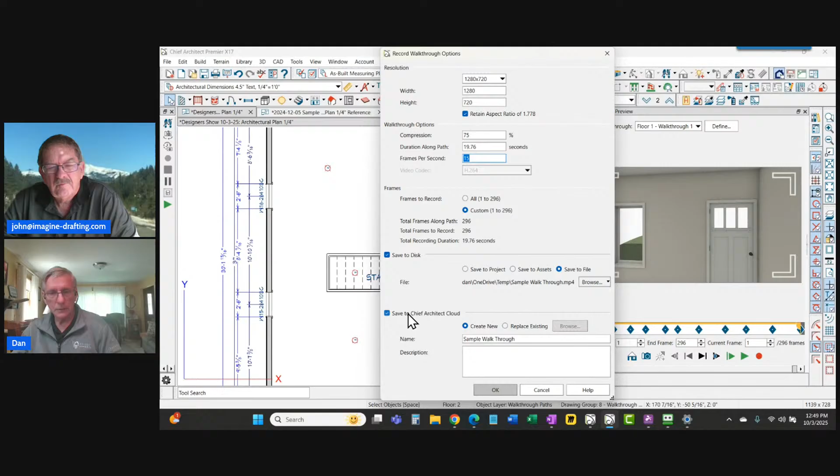And then I'm just going to browse where I want to place it. I'm going to create a new one, and I could either save it to the Chief Cloud, or save it to my disk, my computer, to create a movie file. I'm going to put it in my temp folder, call it sample walkthrough 2, hit save, and click OK. So now it's going to go to my disk and the cloud. I'll hit save, and it's making the walkthrough now.

All right, if I want to go play it back, I can hit this button right here. Well, let's go find the file actually. First of all, you see, I get a little pop-up down here. Normally that pops up in the middle of the screen, but I'm going to click on the link, don't click the X, click the link. And that will open up the Chief Architect browser, and here's that walkthrough I just created.

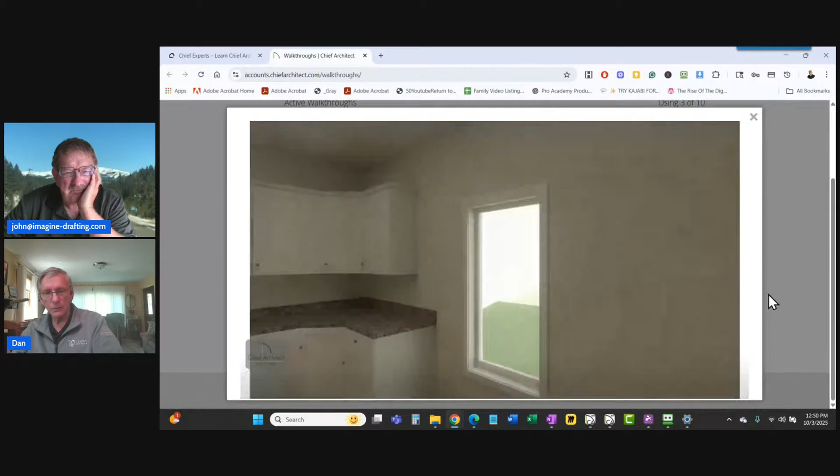I don't know if I added some lights in there, but this is just like I could now send a link to my client and they could go watch this from here. So let's go see what that looks like. Let's hit play, and there's that walkthrough. Yeah, my lighting's really bad, so I need to adjust my lighting.

But you weren't teaching about lighting, Dan, you were teaching about— I didn't even put any lights in this model. Could you put enough detail into the walkthrough so that when you trip and fall down the stairs, we can see what that would look like? I don't know, could maybe try that. No, you'd probably have to set it up. Come on, it'd be fun, we should try that. Not now, spin the wheel.

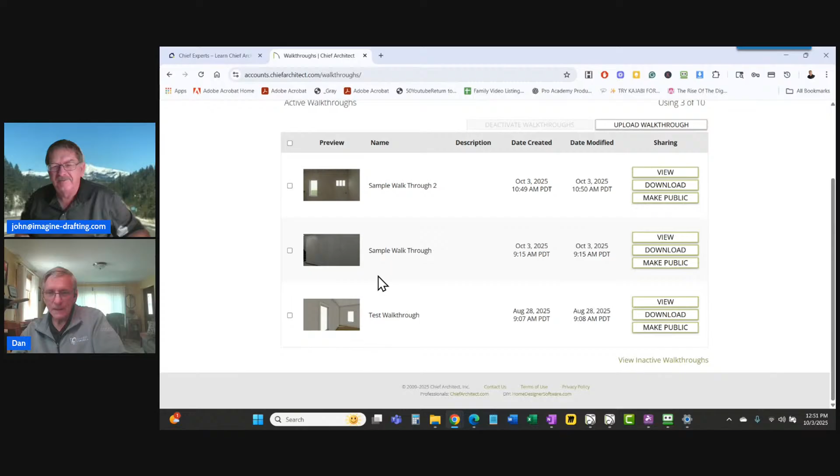I'm not going to do that now, but here's a sample walkthrough I did of a different project.

Is this the one? Yeah, this is a little bit different. This is one I brought forward from an older plan. That looked nice, missing a few textures for the golf screen. This was one of those golf rooms. I spent literally 5 minutes doing this, just trying some stuff out.

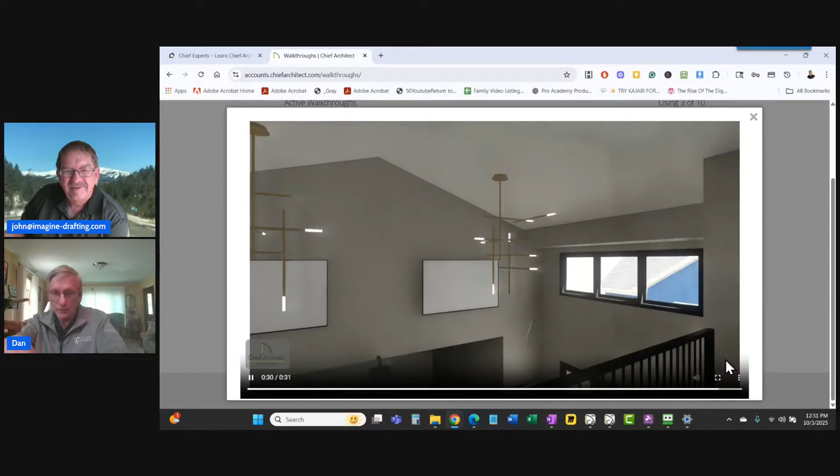Here, I went up the stairs, going to the second floor. Now I could pause at that railing and make my camera go down there and pause, so I could have shown that a little better. But isn't that cool? It's really slick to use. You might want to learn to use that in X17. All right, we're running out of time.

I love that new camera thing, it's really cool. 3D text - apparently I didn't get rid of that. Isn't that something?

Bill, do you have any examples of what you're talking about on your comment here? If you do, type them in so we can talk about them a little bit.

All right, quick tips for the project manager. Again, if you guys have any things you want to see or want us to talk about, bring it up please. All right, let's go back to Chief and the project manager. Let me close this window and open the project browser.

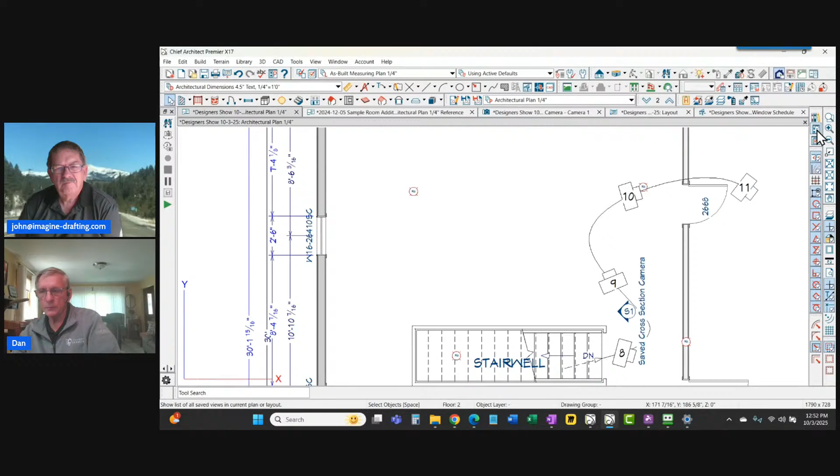Okay, a couple of quick tips. You can add your own templates to the project browser. So you've got the plan template thing here, and you can make changes to those templates on the fly while you're working on other plans. Very slick.

Then we've got the ability - what I've seen a lot of people do is they'll take their project and want to do version 1, 2, 3, 4 of their project. So they'll go into the project and export it. People want to go work on a different computer, or they're saving the project for someone else - creating a project so someone else can work on it, and then they want to bring it back to work on it on their own computer.

So they go File, Import, Import a Project - you go File, Import Project. When you export a project, Chief creates a file that ends with CRPROJ, which stands for Chief Architect Project File. When you save a project file, Chief does a complete backup of everything related to that project. I actually like what it's doing - it's going to create some larger file sizes, so you just have to get used to that.

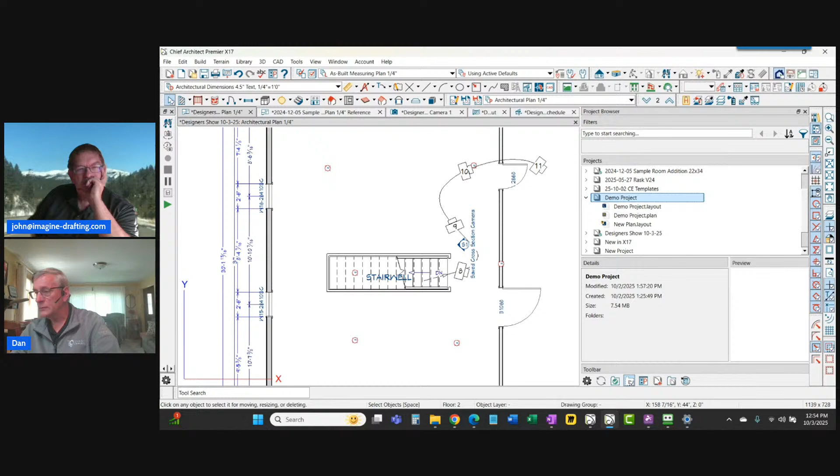So you could drop that in a Dropbox, and someone could import that on their computer. What happens is people will import it and then have demo project 2, import it again and have demo project 3, import it again and have demo project 4. So they're creating all these different project files. What I've been explaining to people is you've got to think of this top level - I'm just going to draw a picture of a folder, because that's what it is. You know how on your computer, when you're storing plans, you're storing them in a situation where...

I keep them in my Dropbox, organized by year. So I go to my Dropbox, and I might have my projects for '25, with a client name for my projects. Look, there's your main folder - that's what a project is. The project is your main folder.

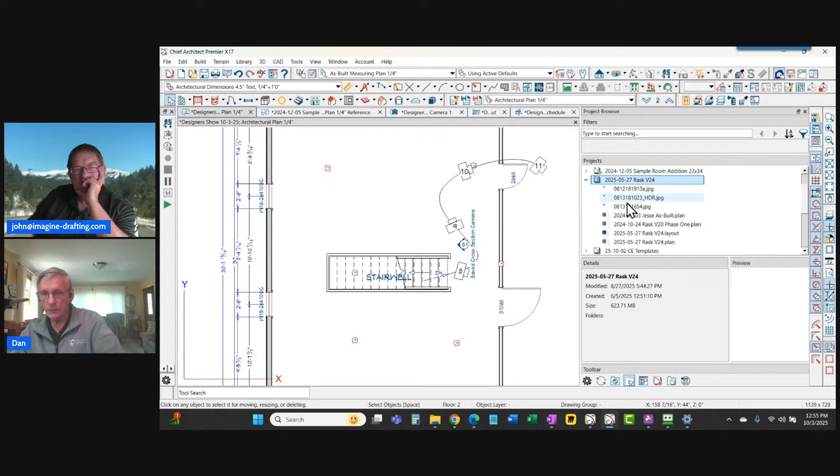So when you're importing a project back in, you're creating another main folder. What I always tell people is just when you import, drag those new files into your original project folder, and then get rid of the one you just imported, or vice versa. That's another way to do it. You might put the date in front of them, like I did here, so you can track your project versions, or give it a version number - however you want to keep track. But just keep in mind, when you import a project back in, it's okay to move files around to your original project folder and you're done with it. You just have to get that system in place to make it work.

Another way to do it, if you want to just have a version 1, version 2, is you could create a new folder and call it version 1, version 2, whatever you want to call it, and then make a copy of that plan and put it in that folder. So now I got version 2 right here.

Just name it V2 or put the new date on it, however you want to do it. So you might go 25-10-03, and put that in front of your file names.

And now you put all the new stuff inside of there. You can also copy with links to a new folder. So if you have all sorts of stuff going on, you've got layout pages and things like that, and you want to copy everything, the layout and the plan and everything that goes with that. This would make a copy of all of those things and put it in a new folder, and then you could just name that version 2. So just use that right mouse button. There's a lot of options that you're going to run into as you work on these, and it's all right mouse sensitive, so keep that in mind.

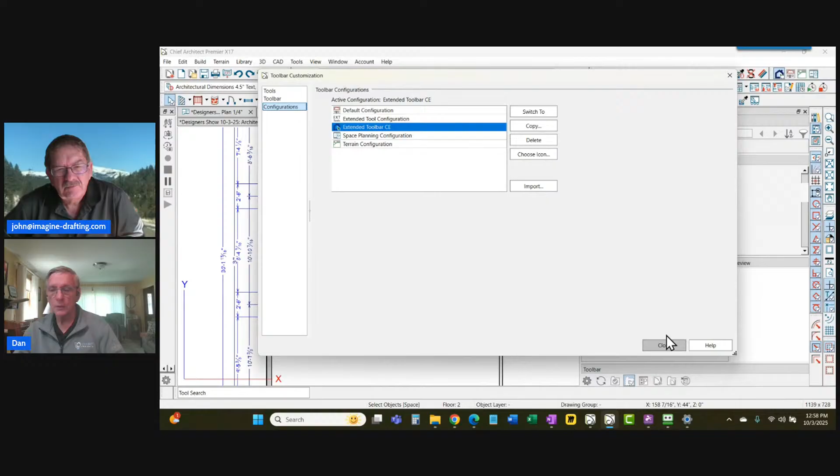The way you do that is you go to Customize Toolbars, and you go over to Configurations, and you now have an option here to choose an icon for that toolbar. It can be a picture of your logo, a picture of whatever you want it to be. So you could draw a cabinet, a cabinet with 3 drawers in it or something like that, and put that on there for an icon. That would mean that's your kitchen toolbar or your cabinet toolbar or whatever you want to do. So it's not creating a library object; it's creating an icon added for that toolbar when you create it. But you could have that icon, that tool, go to a library object.

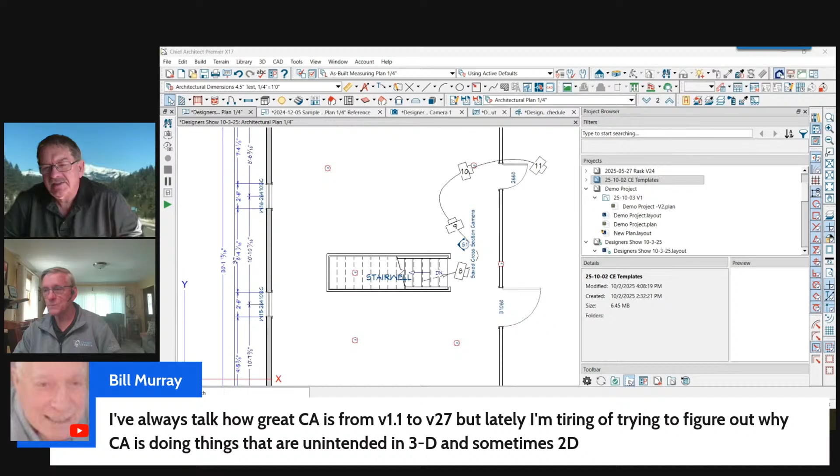I've talked about Chief Architect from version 1.1 to version 27, but lately I'm tiring of trying to figure out why Chief is doing things that are unintended in 3D and sometimes 2D. We determined it's because he thinks it's because of his old age, right here. That's what I asked him about earlier, and that's how he responded. So I feel your pain, Bill. Yeah, I don't know, is it pain or is it fun? I'm still trying to figure that out. We kind of enjoy figuring out these new features that they keep adding, and kudos to Chief for coming up with some of this stuff. I don't know who thinks of this stuff back in their offices. They must have powwow sessions for a long time, and who knows what kind of funny stuff they might be smoking to come up with some of these ideas. But for the most part, I think they're doing a really, really nice job, and just keep giving us more and more tools that we can use to be more professional, make more money, have more services to offer, et cetera, et cetera, et cetera.

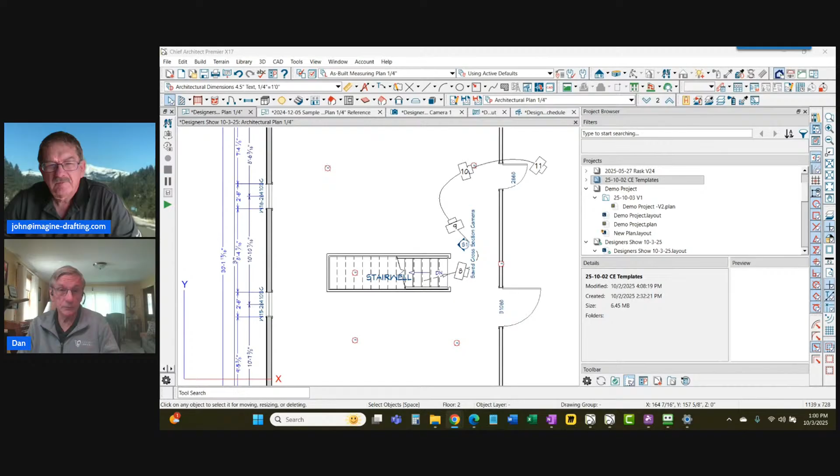All right, cool. Looking forward to enjoying the fall here. Yeah, we've had really hot weather, so I think we're ready to go for cooling off a little bit. All right, guys, thanks, we'll see you next time. Take care. Bye. Bye-bye.